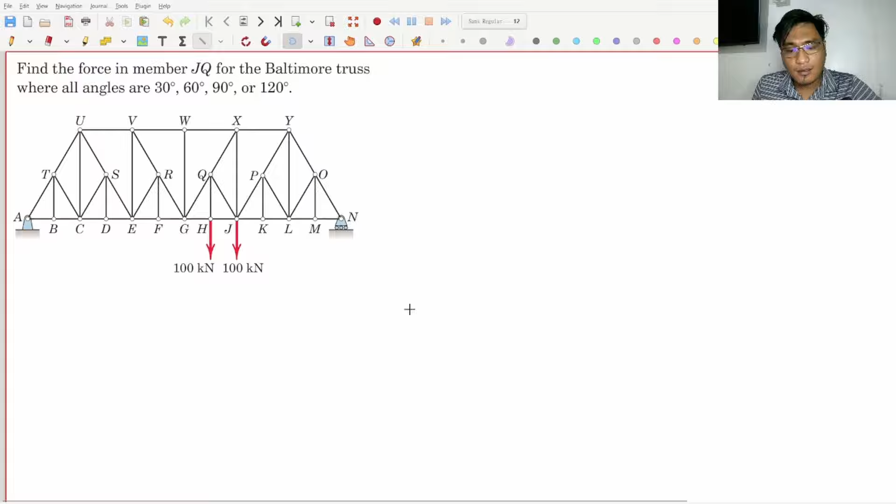Let me just remind you of the difference between method of sections and method of joints. In method of joints, what we previously learned is that if I have a structure, the basic concept is that if this whole structure is under equilibrium, therefore every joint must also be under equilibrium. So if I isolate joint H, joint G, joint F, or any other joint, it will also be under equilibrium.

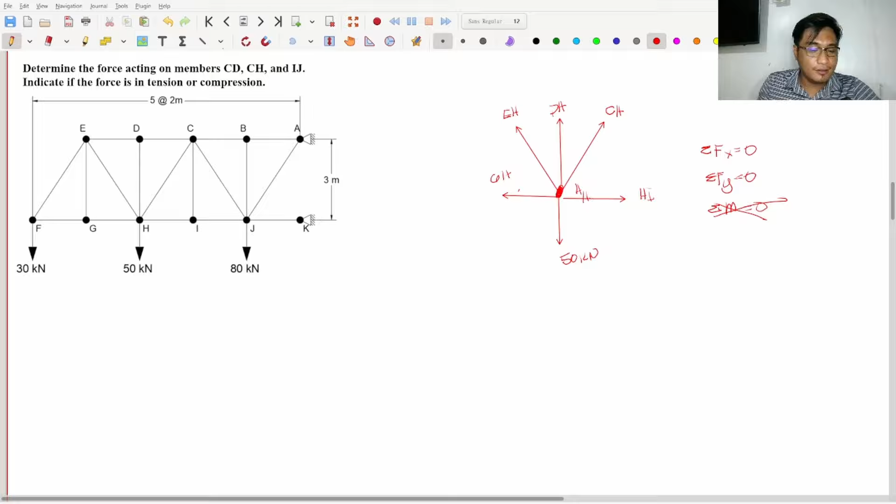So that's how we do method of joints. Let me just erase this one. Now, what about method of sections? If in method of joints, my whole structure is under equilibrium and therefore my joint is in equilibrium, it's the same in method of sections. Same concept: if my whole structure is under equilibrium, therefore my sections, or any section of my truss or structure, must also be under equilibrium.

So how can I make those sections? For joints, to isolate a joint or to do method of joints, we isolate joints. Here, we isolate sections. The question is, how do we make a section? That is simply by making a cutting plane, literally cutting the beam to divide it into different sections.

For example, we already discussed this. In this problem, it says determine the force acting on member CD. Let me just highlight this, member CD. Then, what else? Member CH. This is member CH. Then member IJ.

So now, what we'll do is literally put a cutting plane and divide the section. So our cutting plane would simply look like this. That would be your cutting plane. I'll call this cutting plane A.

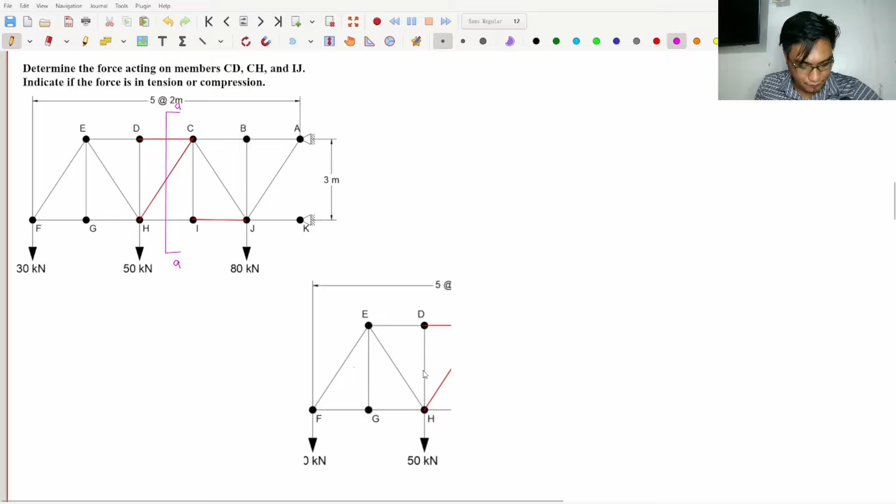So to make it clearer, let's just isolate this. I will literally just cut it, I just cut it. So this is... let's put it here. So this is isolate.

Sorry, this got cut off. Isolate the left side. Left side of cutting plane AA. Okay, this is cutting plane AA.

Sir, what if I considered the right side instead? That's okay too, either side works. It may be the left side, right side, bottom side, or upper side. All sections should be under equilibrium. But I chose the left side.

Tama? I chose the left side. Why? Because on the left side, there are no reactions, so I don't need to solve for the reactions first. If you opted to choose the right side, that's okay too, no problem, but you'd need to solve for the reactions at A and at K. But since I chose the left side, I don't need to put in the reactions, or I have no reactions I need to add. So make your life easier.

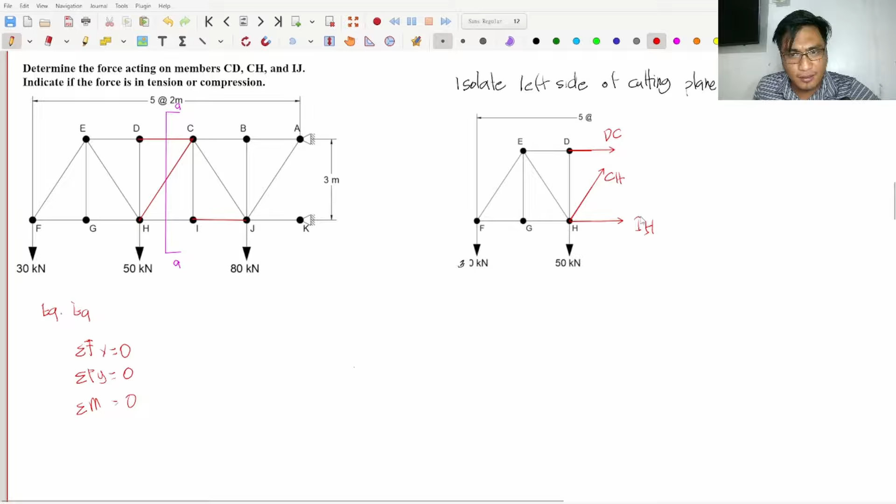So, 1, 2, 3 unknowns, that means I can solve it. So let's just solve for DC, CH, and possibly IH also. Once I've solved those three, I can just do another cut, like the one from before, because I already know these two, I only have 2 unknowns left, and therefore I can solve for IH and IG.

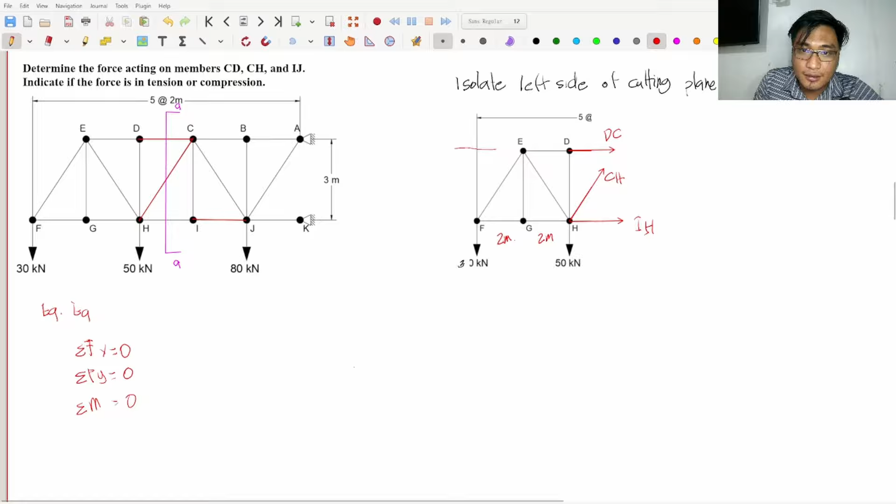Okay, so let's do this. I already have my cutting plane. To make it easier to see, let's just input the measurements. It says here this is 2 meters, then this is also 2 meters, then the height is 3 meters. So if this is 2, this is 3. Therefore, the slope here, the horizontal, this is it.

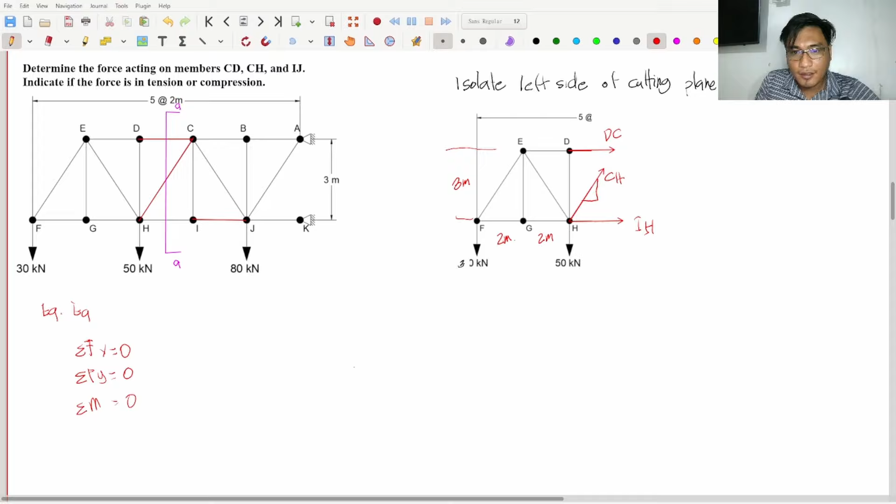The horizontal component is 2, the vertical is 3. So same thing here, right? 2, 3, then 9 plus 4, that's square root of 13. Square root of 13, tama? So, ibig sabihin...

Let's just solve this. Paano natin i-solve yan? I think the best way is to get one of the required values, which is CD or DC. Bakit DC pala? Let me just make this clearer. Okay, eto, let's just put CD. Tama? Ugaliin na lang natin na mauna yung alphabetical sa pag-name natin sa kanila.

So to get member CD, which is one of the unknowns or requirements of the problem, I think it's best if I take moment at H. Bakit maganda mag-moment sa H? Kasi if I take moment sa H, tama, one move lang, no? CH would have 0 moment, IH would also have 0 moment. So therefore, CD has a moment arm. So CD lang yung papasok.

So if I take... let's just make it black. Summation of moment at point H, this is equal to 0. So if I take moment at point H, I will have CD. I assume tension, so that is going to the right, so this rotation is positive. Tama? Clockwise, multiplied by 3, minus 30 times 4.

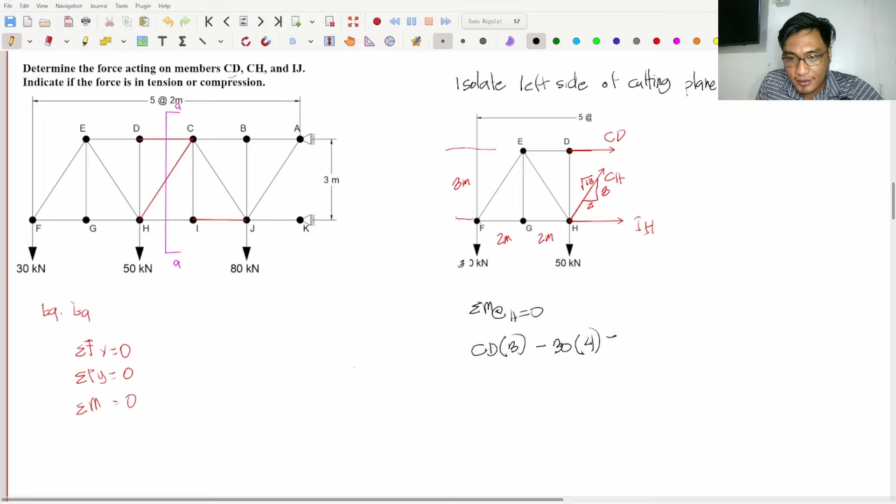Tama, this is 30. Minus kasi it rotates counterclockwise, tama? So 30 times 4. Ano pa ba? Wala na, kasi yung 50, tatama rin siya sa H, 0 moment. CH, 0 moment. So lahat ng yan, 0. So okay na, therefore CD is equal to 40.

Tama ba? Siguraduhin lang natin, baka magkamali. Negative, lipat sa kabila, 30 times 4 divided by 3. Okay, 40. 40, this is kilonewtons. So 40 kilonewtons, and this is positive. So therefore, my assumption that it is tension is correct.

So okay na ako sa one part, CD. Ngayon, dito naman tayo sa CH. So CH, I think it's also as simple as doing summation of forces along Y, equal to 0. Why is it better to do summation of forces Y as my next step? Kasi if you look at the members or forces here, CD okay na ako dito, na-solve ko na 40. Ngayon, if you look at it, the only unknown that has a Y component is CH, so pwede na akong mag-solve ng CH.

Summation of forces Y. So CH, going up, so that's positive, times quantity 3 over square root of 13. Wait lang, palagin na lang natin yung sulat natin, baka sa ganda. CH, manipis ata masyado yung sulat. CH times 3 over square root of 13.

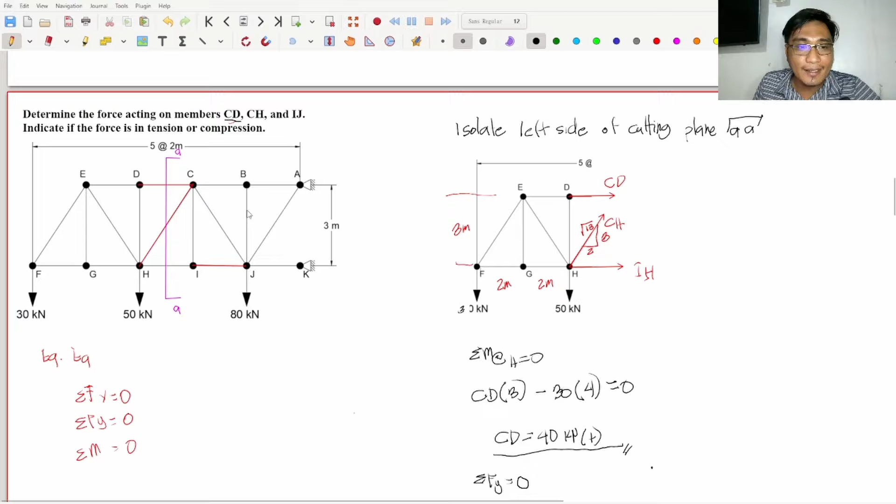Okay, now how can I solve, how can I do member or joint IJ? Wait lang, let me just cut this, copy, paste natin dito. Okay, so now if I do IJ, tama, ito na lang yung hindi natin nasosolve. Okay, so ito na lang IJ yung kailangan natin i-solve.

Ngayon, tignan natin ito na, let's try to investigate. Okay, the most obvious cut is that I can cut it like this. Tama ba? Yan yung pinaka-obvious na cut, kasi una, tatlo yung na-cut, so kaya kong solve. Pero kung titignan mo, magmumukha lang siyang ganito, tama? Where this is IH.

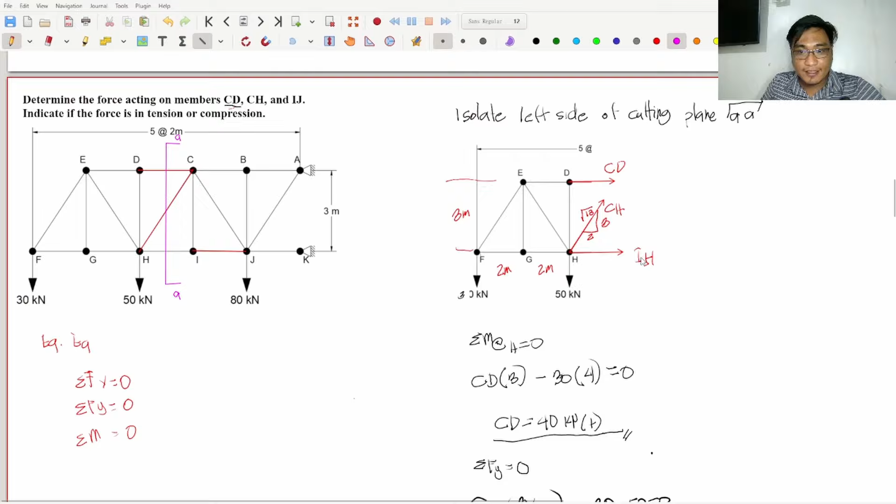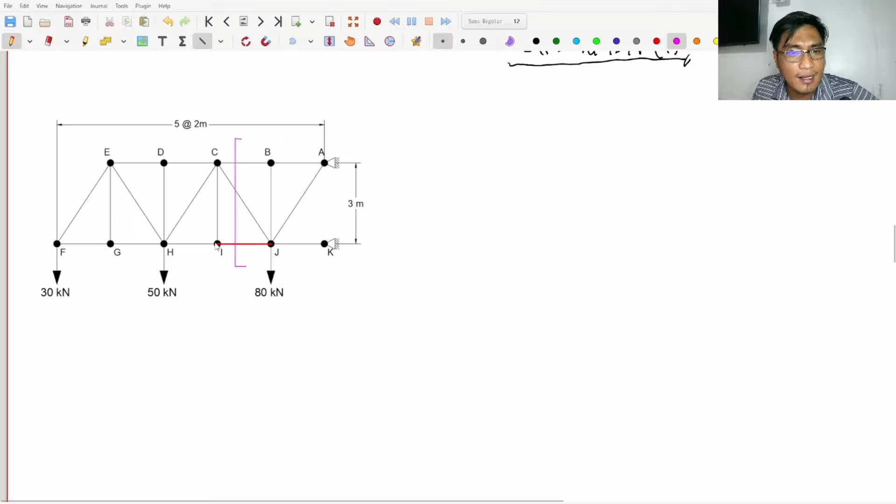Pero if you would try to do an investigation before going through with this cut, bago ko ma-solve yung IJ, ang gagawin pa natin is take summation of moment sa I para makuha yung CB. Parang ganito, kasi ito lang naman yung itsura niya, same forces or same orientation of forces, dagdagan lang ng isang span. Same lang din kasi yung AA parang cut lang din naman ng BB, na-move lang tayo, so ganito rin yung itsura ng forces.

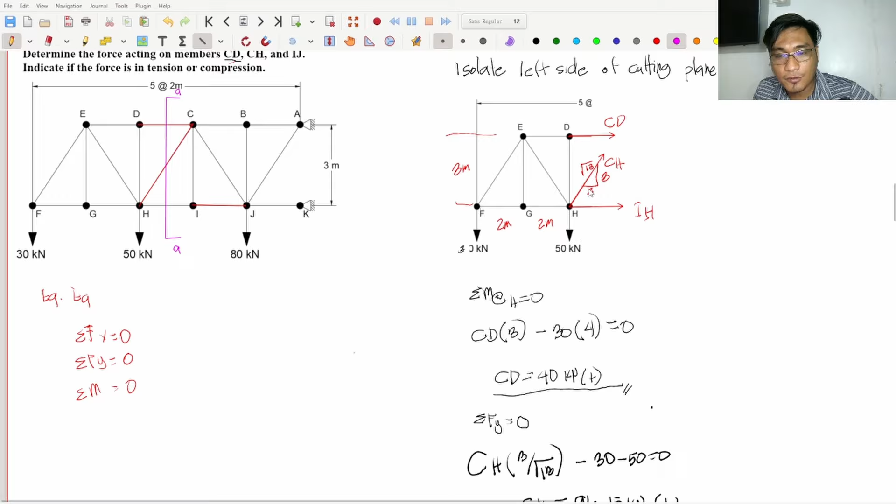So para ma-solve yung IH or yung IG naman in this case, kailangan ko mag-moment sa H. So if I take moment sa H, makukuha ko yung nasa taas, which is yung CD. Tama? Okay, wait lang. So after that, I take summation of forces Y para makuha yung CH, tapos summation of forces X.

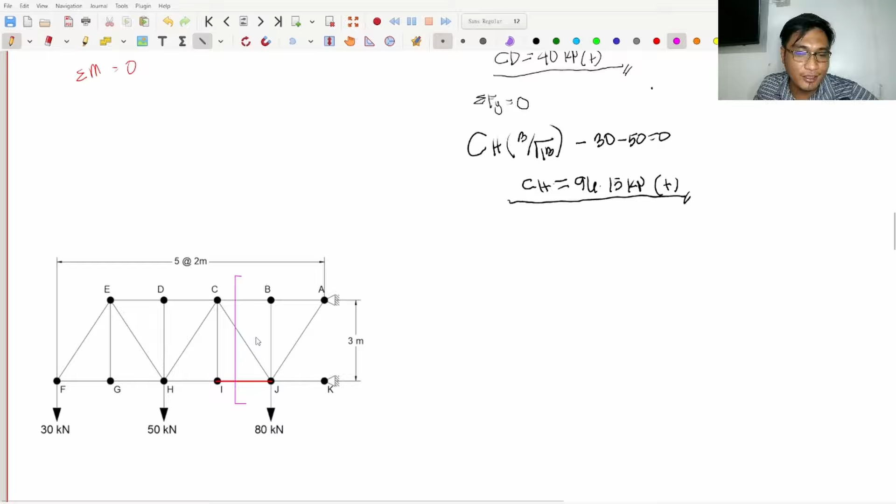So, that's 3 moves, right? So, I can do that. You can always do that, because the answer would still be the same, the answer would still be correct. Right? I can do that.

But thinking that there are three steps there, maybe there's an easier way. If say you're in a quiz or assessment and you're running out of time, and that's the first thing you thought of, I think it's best for you to do that right away. But if you're still trying or you still have time to investigate and check if that's the fastest way, I think it's better if you do it that way.

Instead of cutting it that way, what if what I do is cut along this way. So now, this I'll call cut BB. So if that is my cut BB, right, it still is a continuous cut. It doesn't matter if it's straight. It's still a continuous cut that starts from the outside of the truss and ends at the outside of the truss. So when my cut is like that, wait, let me just check.

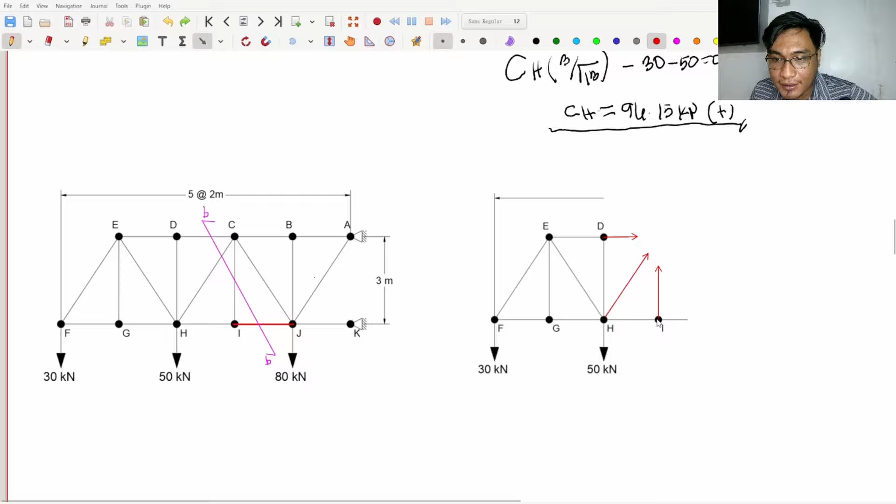So I have... Remember, all of the cutting, or all the method of sections that we will do here, needs to be indicated, needs to have a free body diagram. In your assessments, if you don't have a free body diagram, I won't check it.

Okay, next. So this would be DC or CD. This would be CD, this would be CH. And CD and CH are already known, right, there they are, I solved them earlier. Then this would be IJ. IJ. Then this would be, ay sorry, this is actually CI, CI. Then this is my IJ, which is the unknown.

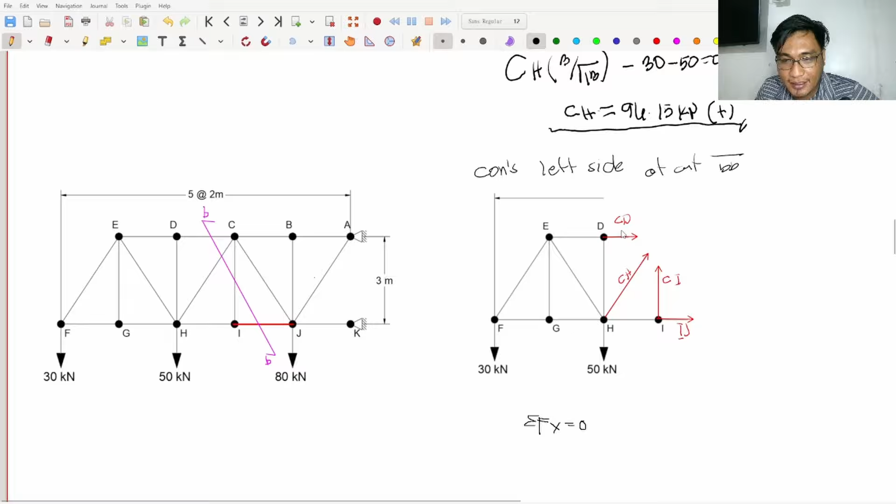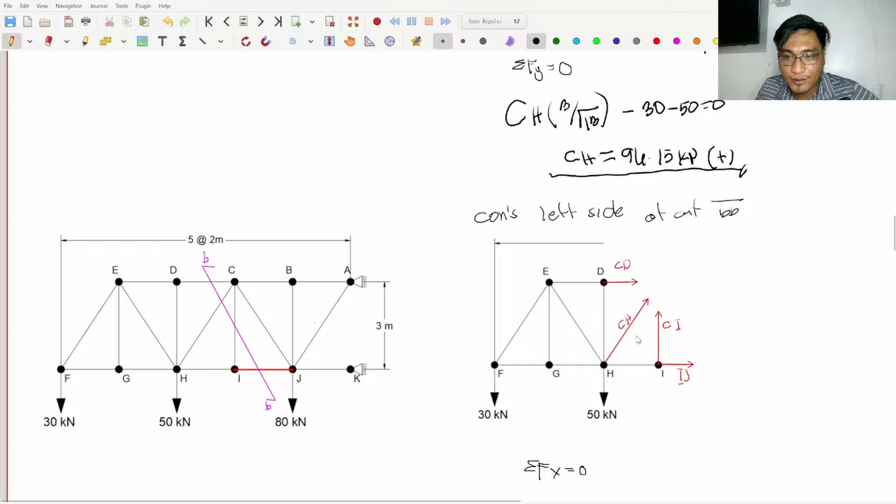Right? If you do summation of forces along X equal to 0, what's left are CD, CH, and IJ. But CD and CH are already known. So that means you can already solve that. Right? Because CD, check that, solve that. CH, solve that. IJ, that's what you need to solve. So you can already solve it using summation of forces along X.

Right? Okay, you can do that. But there's a simpler way to do it. If I extend this point, or if I extend this line here, extend this line here, right, that's all the line of action, they'll meet at a single point. So now, that single point, I think it's point C. Right, this is our point C from earlier. If I take the summation, if you did summation of forces X, it's the same thing, you'll still arrive at the same answer. But I think this is much simpler.

Summation of forces along X, force. Summation of moment along C, or at point C, this is equal to 0. Why do I prefer to take moment at point C? Because earlier, in summation of forces along X...

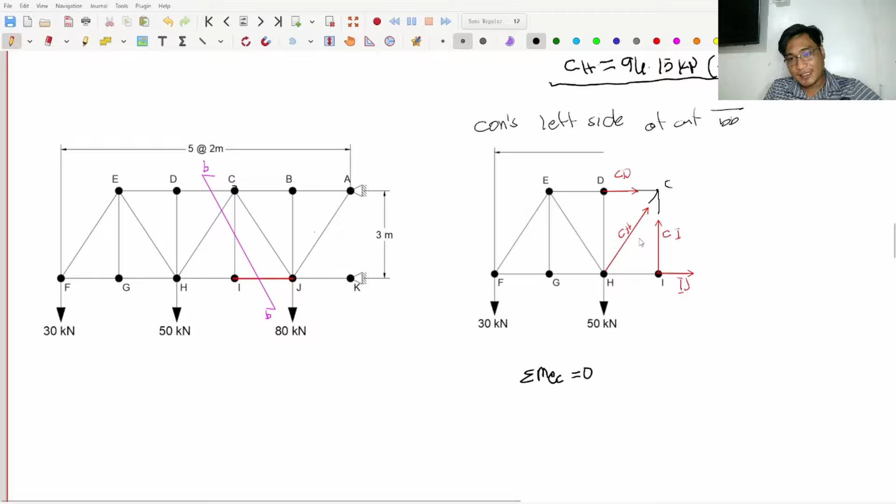What happens is that my answer for CD and my answer for CH, I need in order to answer IJ, which, I think, if you made a mistake in CD, your IJ would also become wrong. Your answer for IJ would become dependent on CD and CH. But if I take moment at C, I still get the same IJ, but I won't depend on CD or CH. If I made a mistake at solving CD and CH, I can still arrive at the correct answer at IJ because I don't need to use these forces to answer IJ.

Again, you can do that as your line of thinking. But if you're sure about CD and CH, you can do summation of forces X. I'm just showing you options to do this. So it's not, especially in method of sections, this is not a cut-and-dry, straightforward solution. You also need to analyze it, it's up to you how you want to answer it. There's many ways to kill a chicken, as they say.

Okay, so summation of forces, or moment at point C, this is equal to 0. So the moment of CD, 0. Moment of CH, 0. Moment of CI, 0. Right? Okay, so for IJ, I have IJ.

IJ is rotating at point C counterclockwise. So negative IJ, the moment arm is 3 meters. Let's check this, it's counterclockwise. So minus 30 times, this is the moment at C.

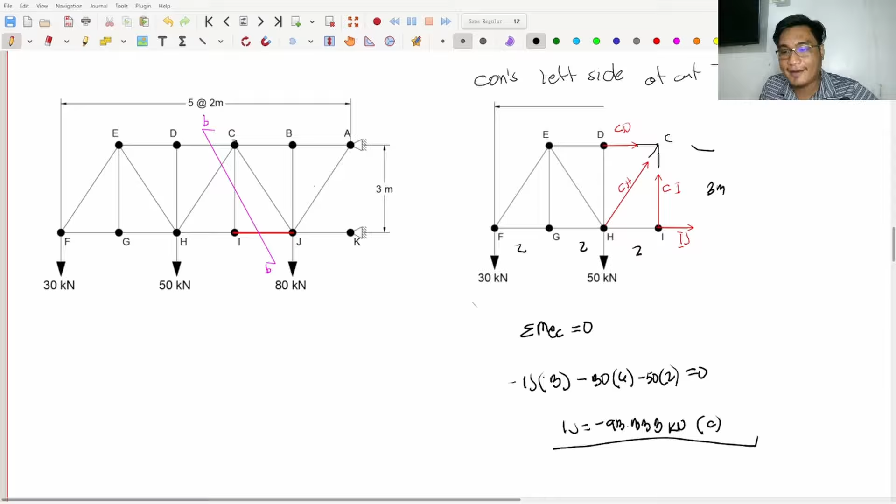That's 93.33333, so IJ is equal to 93.333 kilonewton, sorry, negative. So IJ is equal to negative, and since I got a negative value, my assumption that it is tension is wrong. So therefore it is compression. Now that's the answer, we're done with the problem.

If you want to check, summation of forces along X is equal to 0. That's what I said earlier, one way to solve for IJ. CD is 40 positive, plus CH which is 96.15, times the slope which is 2 over square root of 13, since that's horizontal.

CI has no component here, the 50 also has none since it's vertical, 30 also has none. So IJ, this is equal to 0. Therefore IJ is equal to, let's check if it's still the same in case we made a mistake, 96.15 times 2 over square root of 13.

That gives 93.33. Correct. The discrepancy is just because this is 93.333 versus 93.334 due to rounding off of 96.15. But they're still basically the same. I will still consider both answers. So negative 93.33 kilonewton, so this is still under compression.

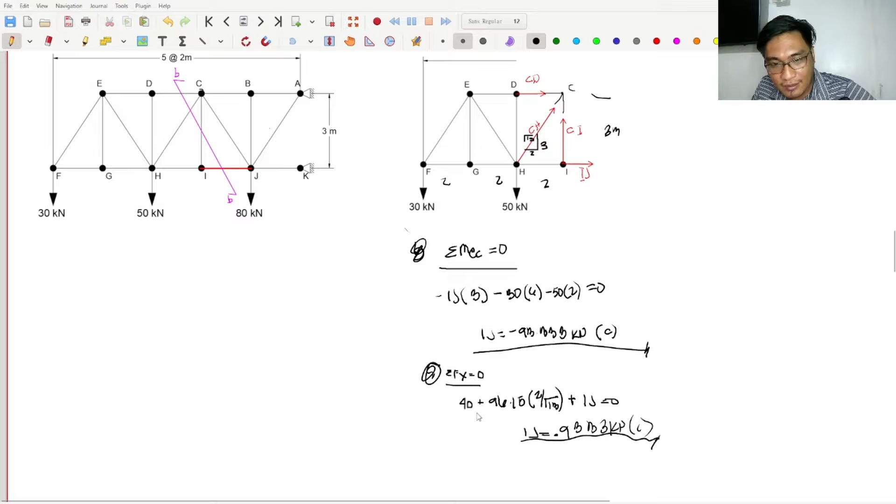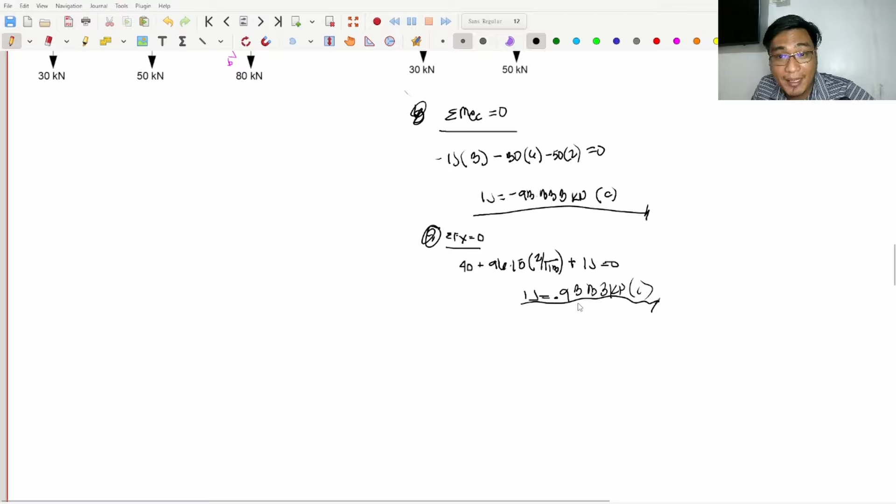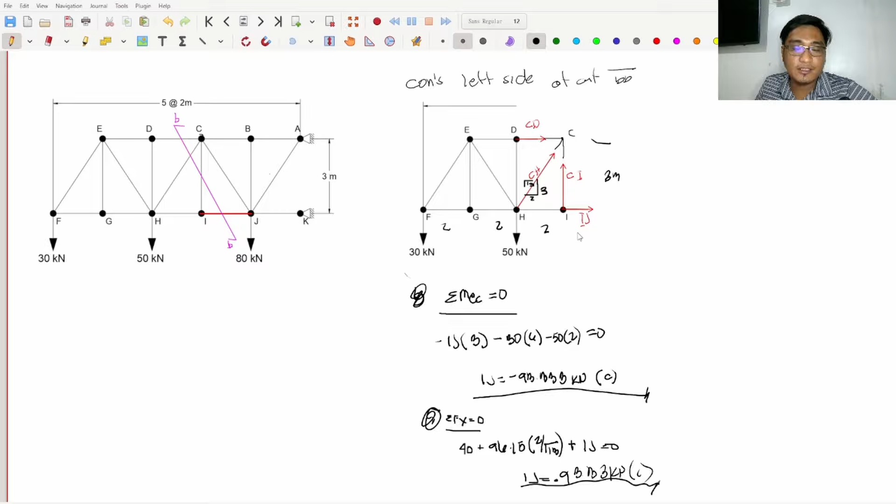So again, it's up to you. I'm not imposing any one correct solution as long as you still use the right concept. Remember, there's no single correct solution, there's only the right concept. Okay, after this, let's move to the next example.

Let's go to this one, it's easier. Okay, problem number two. It says, find the force in member JQ.

Since it says find the force in member JQ, where is that? Here it is. Only one was asked for, right? So this member here. Looking at this, it doesn't give a distance. Since it says all angles are 30, 60, 90, and 120, I think this is 90, this is 60, and this is 30.

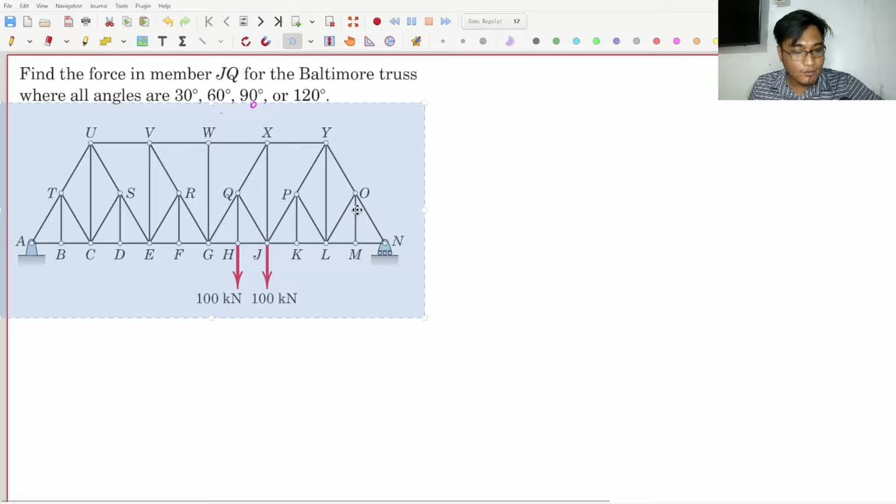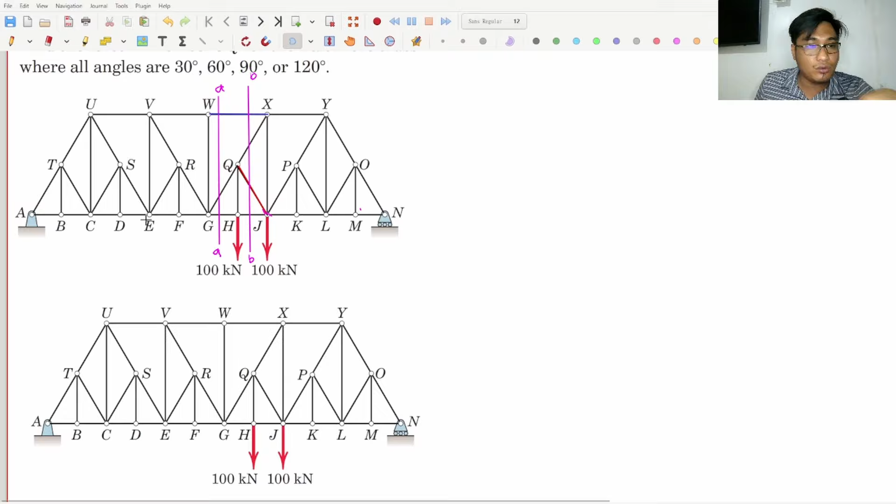Okay, so pwedeng ano, no? So I think before we do that, I think it's better or required for us to solve for the reactions, kasi hindi naman natin masosolve to. Kasi if I consider the left or the right side of the section, the cutting plane, I still need one or two of the reactions.

So I think it's better if I use, ano ba maganda? Left side na lang, mas trip ko tong left side. Ay sorry, right side na lang kasi puro tayo left. Parehas lang naman yan. So dito meron tayong, oops, ganyan, para hindi magkalituhan, red din to. Okay.

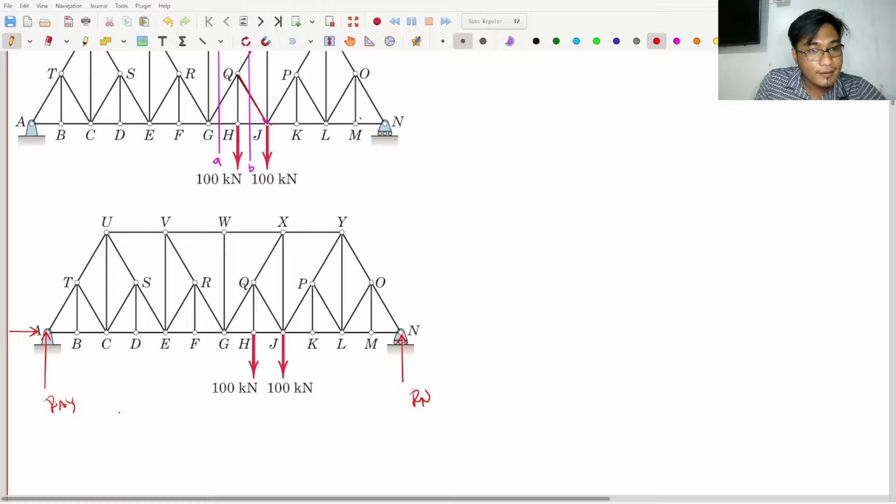Okay, now since pin yan, syempre may RAX. Pero alam mo na kasi yan, if we do summation of forces along X, ito 0 na yan. So this will now be, ito ay RAY, tapos ito ay RN. Now, oo, walang distances yan, no? Pero I think, since sabi niya kasi kanina dito, they are all 30, 60, 90, 120. So ibig sabihin, pare-parehas lang yung mga angles na yan.

This is just X. If I call 1, this distance X, so dapat yan, lahat yan X din yan. So I'll just call itong mga distances na to as X. Okay? So if I call this AB is X, BC is X, CD is X, DE is X, EF is X.

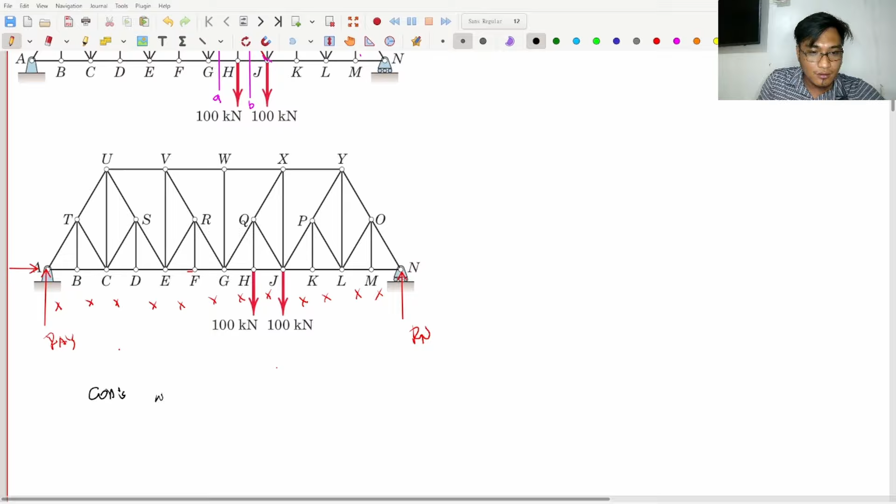Okay, ibig sabihin, considering, so now, just to use this. So consider the whole structure, eto siya. What I will have is that if I do, sorry, moment at A is equal to 0, para makuha ko lang yung RN, I will have RN, tama ba? This RN here is 1, 2, 3, 4, 5, 6, 7, 8, 9, 10, 11, 12x.

12x minus, sorry, this one is rotating counterclockwise, so it's negative. This one naman is rotating clockwise, so positive, plus 100 muna. That 100 is 1,2,3,4,5,6,7, so 7x.

Okay, matakot sa x, no? Mawawala yan. Plus 1,2,3,4,5,6,7,8, so 8x. So 100 times 8x. This is equal to 0. So therefore, ngayon kung papansinin mo, lahat sila may x. So if I divide all, or multiply na lang, mas maganda. If I multiply both sides of the equation with 1 over x, tapos eto rin yung 0, multiply ko rin ng 1 over x, ang lahat ng x ay magka-cancel out. So wala na rin siya.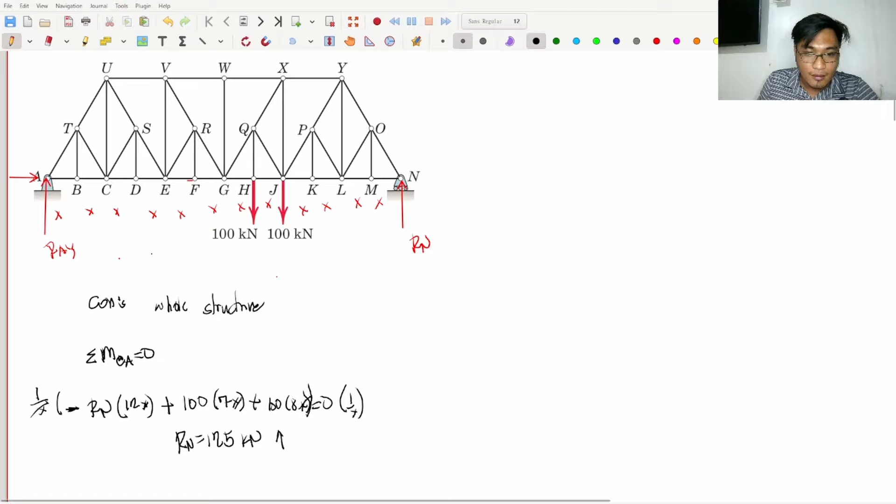Parang 100 times 7 plus 100 times 8 divided by 12. So this is 125. So Rn is equal to 125 kilonewton positive, so going up. Okay, so that's Rn. So Rn ko daw, ito ay 125. So now if I know that Rn is 125, I can just simply now isolate.

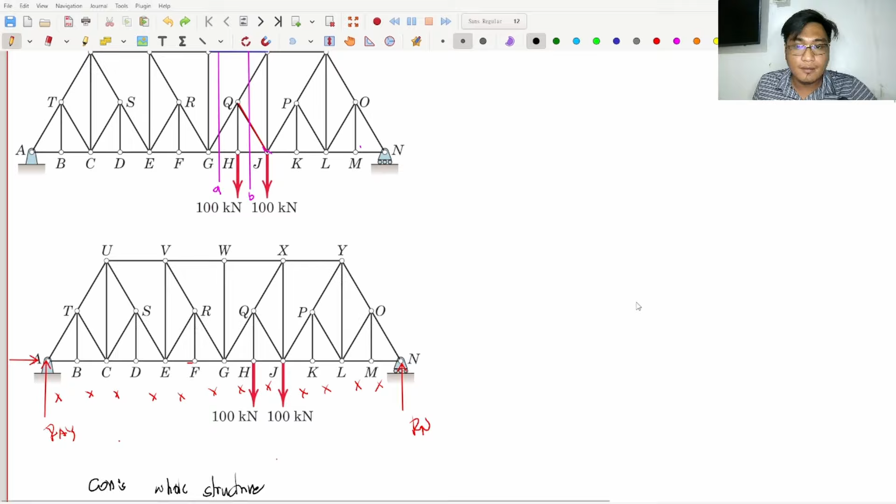I can now just simply cut it at AA, tama? Yun, cut natin sa AA. Okay, so ito siya, no? Palagay natin ng konti. Yan, lagay ko lang dito. So this is now Rn.

Is equal to, this is already known to be 125 kN. Tapos ito, nabura lang pero 100 yan. Tas eto yung aking WX, tama? Assume natin yan na lagyan natin ng direction or ng force, equivalent force system niya, which is tension na lang din, no? I'm assuming everything is tension. So ito naputol din. This is also tension. Tama? This is also tension.

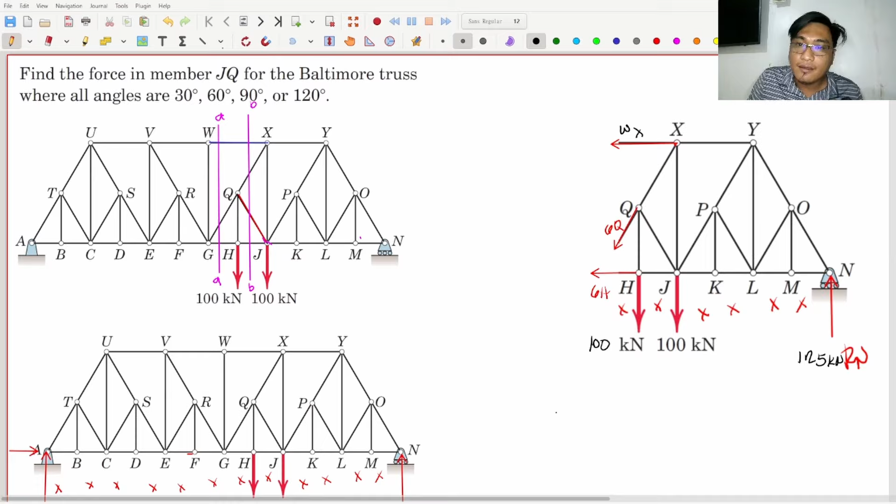Okay, so this is WX, this is GQ. This is GQ. This is GQ. Tapos ito ay GH. Okay, so now this is considering right side of cut AA. Okay, so tama. Yun yung cut AA ko, no?

Okay, now considering the right side of cut AA, alam ko naman na yung game plan natin, di ba kanina? Solve for WX first, then now proceed to cut BB. Tama? So if I solve for WX here, I can do, ano ba? Ayan. Tama? May intersection yung dalawang yan, di ba? Kasi if I extend this line here, this point, the point of intersection ng GH tsaka ng GQ is etong point G. Tama? This is point G.

Yan. So if I take moment at point G, I can solve for WX. Pero the problem is, if I take moment at point G, the problem is hindi ko alam yung distance na to. Pero I think I can solve this. Yan lang naman yung isa. What's this distance? Ano tong distance na to?

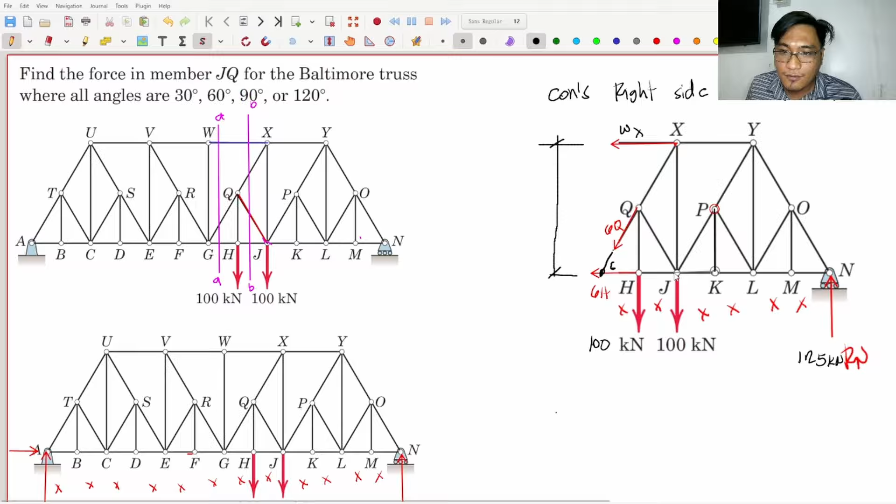Okay, so now let's consider. If this is x, ito. If this is x, so let's make a simple triangle. So let's try to create a triangle. Okay, so ito siya, no? This is this triangle. Yan, itong triangle na to, ito siya. Baba ko lang siya dyan, lagay ko siya dyan.

Tapos, ang sabi natin, ang alam ko sa triangle na to, okay sorry. So ito daw ay x. So if this is x, tapos sabi niya kasi, lahat ng angles 30, 60, 90, and 120. So ibig sabihin, ito ay 30, ito ay 60, tapos ito ay siyempre 90. 30, 60, 90 triangle. Yan.

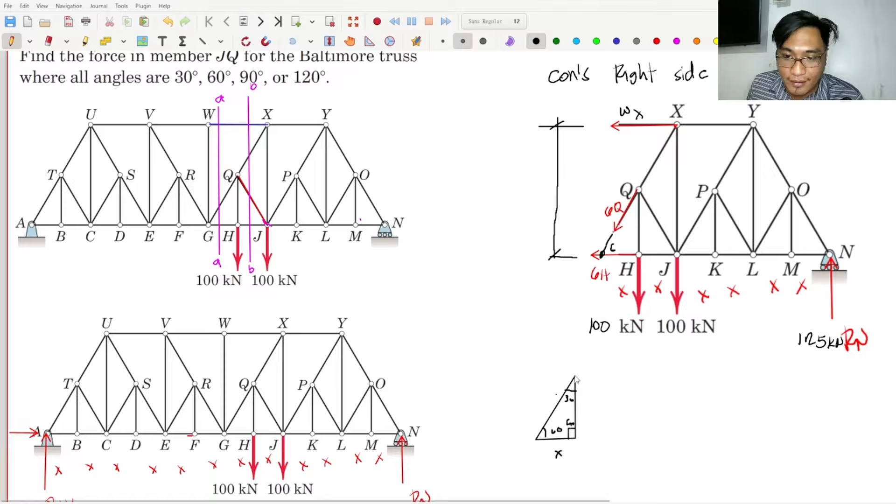So if it's a 30, 60, 90 triangle, what I want to find out is this distance. Tama ba? Yan. Okay, so now just use your trigonometric function. If I know that this is 60, okay let's just zoom it in. If I know that this is 60, tama ba? So I can just use the trigonometric function. Tangent 60 is equal to opposite. Let's just call this y kasi alam kong y yan. So y over x. So what's tangent 60?

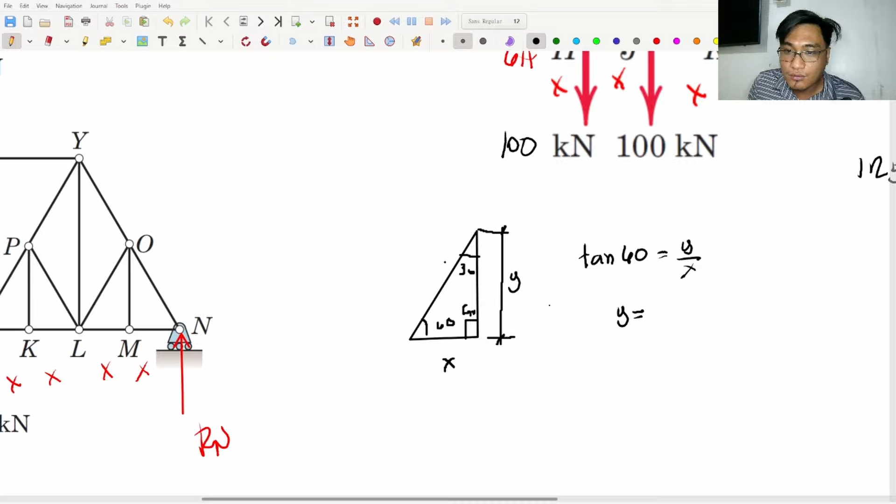Tangent 60 is square root of 3. So y is equal to, tama ba, x times square root of 3. Okay, tama. So itong distance na to, this distance is x square root of 3. Okay, so if this is x square root of 3.

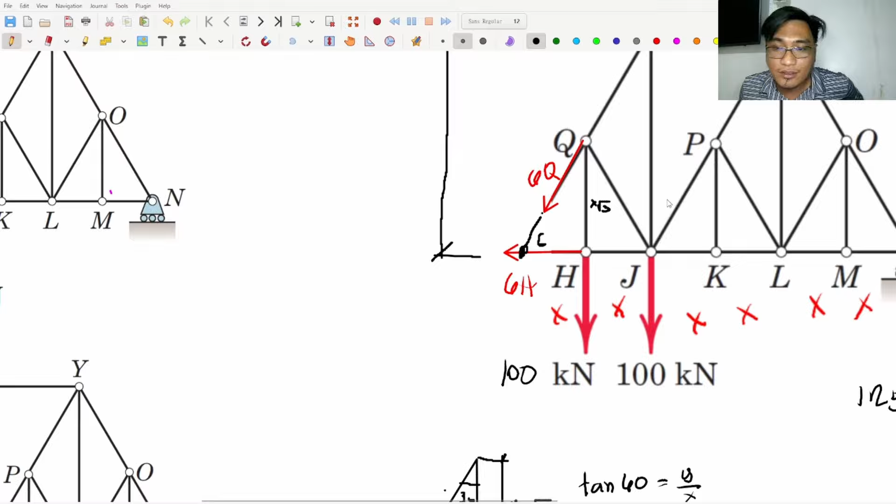So wag na kayo matakot sa x. Consider nyo lang yung x as 1 kasi lahat naman yan magka-cancel lang, or x is equal to 3, I think it's easy to realize that this triangle, etong triangle na to, is an isosceles triangle. Kasi kung lahat naman ng angle na to, if this is 30 degrees and this is 30 degrees, if this is x times 3, x square root of 3, eto din ay x square root of 3. Tama ba? So the distance from this to this is 2 times x multiplied by square root of 3. So ayusin lang natin para maganda tignan.

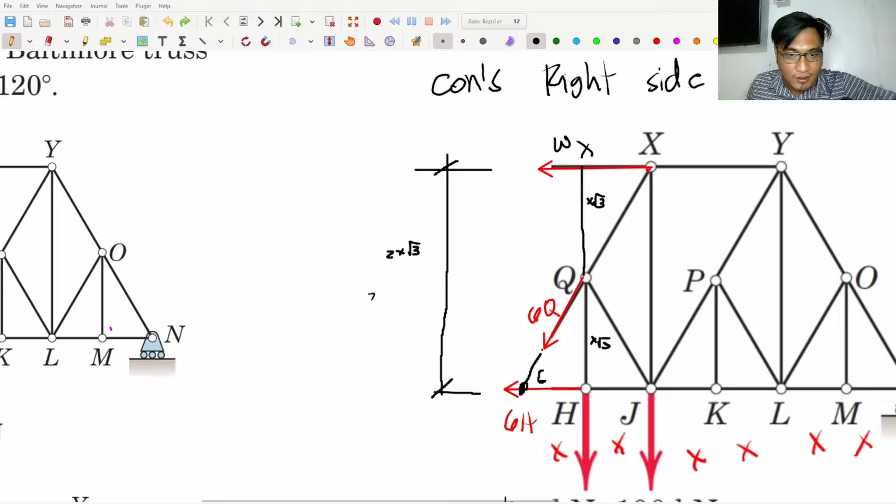2, you can square that. This is 2 square root of 3 x. Okay.

Now if I know that, this is not a mechanics problem, it's algebra and trigonometry. So it will be as simple as doing summation of moment at point G. I will take moment here at point G because GQ and GH, which I don't need, will hit point G with zero moment arm. The only unknown I'll have is WX, which is what I need in order to use cut BB.

So if I take summation of moment at G, let's start with WX. WX multiplied by, and this is WX is 2 square root of 3 times X. Minus, this X here is just the name, the other X is the actual distance. Minus, let's label it WX bar, just so we know.

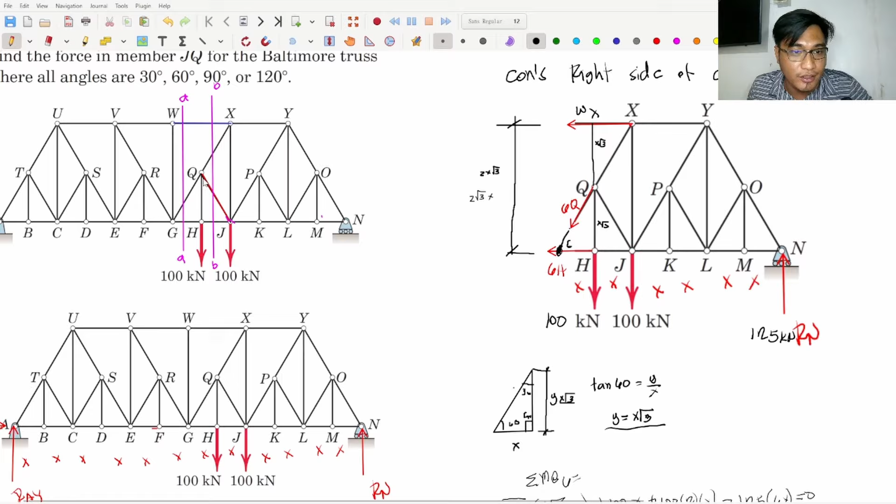Now, if I've already solved for WX, I can go directly to cut BB, since GQ and GH were not asked. I only solved for WX because if I consider cut BB now, this is our cut BB. Wait, let me show you.

Let's move this a bit. Okay, so this is cut BB. So now all I need to do is consider the right side still, the right side of cut BB. If I consider the right side of cut BB, this is what got cut, you have 1, 2, 1, 2, 3, 4.

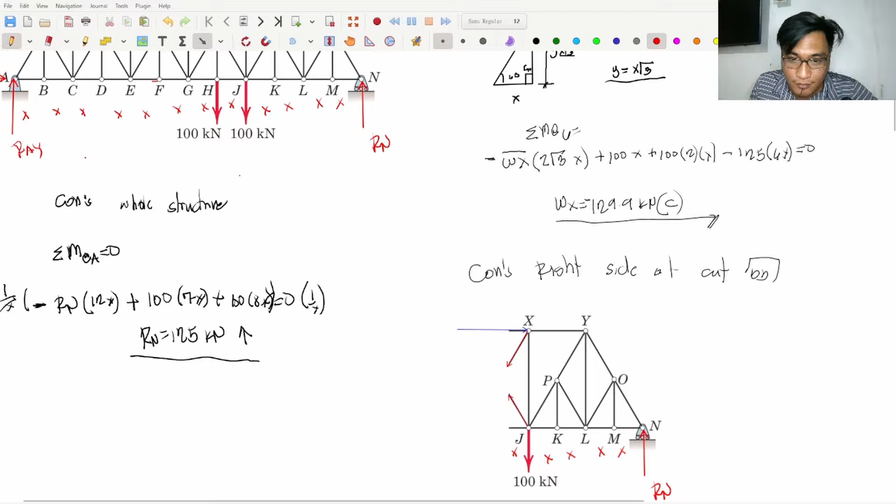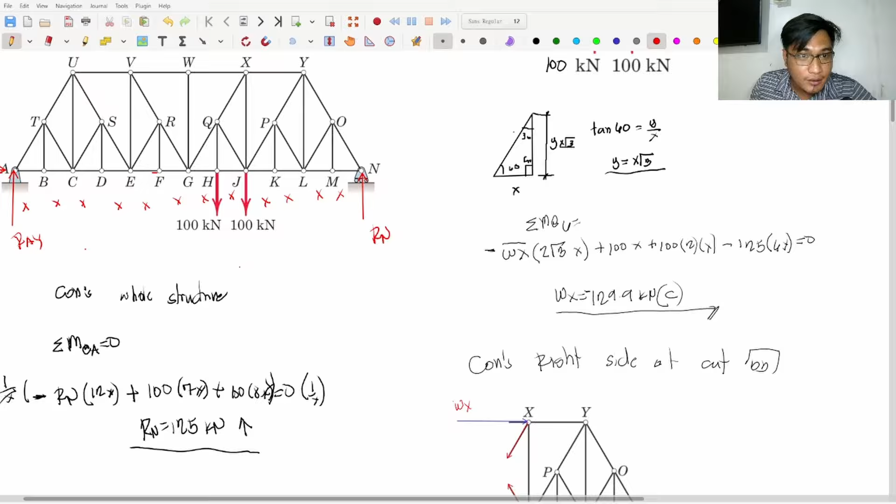This will now be, what was it earlier, Wx. So this is Wx, then this is Qx, then this is JQ, right, that's what we're looking for, JQ. Then this is HJ. Okay, so we're good there.

Now I know that Wx is already equal to 129.9. So we're complete. Then I also know that this distance here is x square root of 3, or square root of 3 times x. Okay, this distance here up to this point.

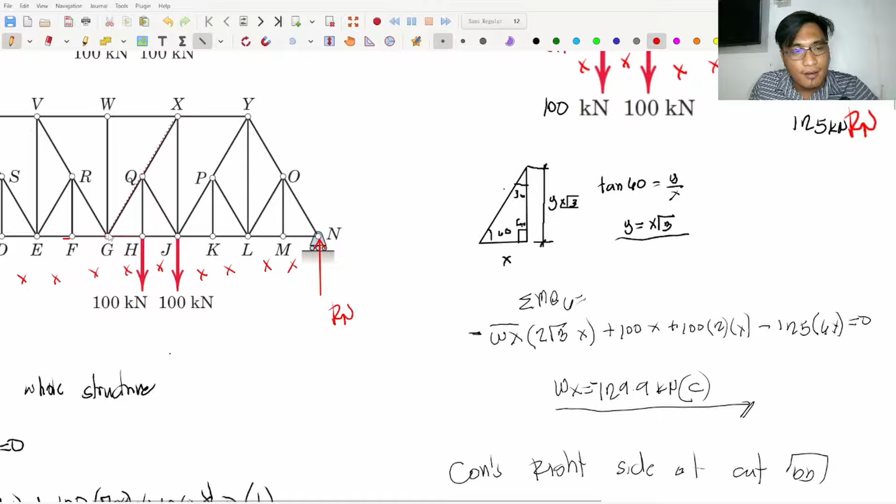This point here. So if you look, nothing. If you look here, right, this is it. This is XQ. Let's extend it to point G. The point of intersection with this force is point G. Right, this point is already point G. So this is, wait.

This is point G. So if I take the summation of moment at point G, this is equal to 0. That means QX and HJ are gone. WX is there, but I already know it, so I'm okay with that.

Now let's take JQ, since it's inclined, I need to break it down into its components to use it. Because this distance, if I extend it, is not the perpendicular distance, so I cannot use that distance. So what I need to do is break it down into its components.

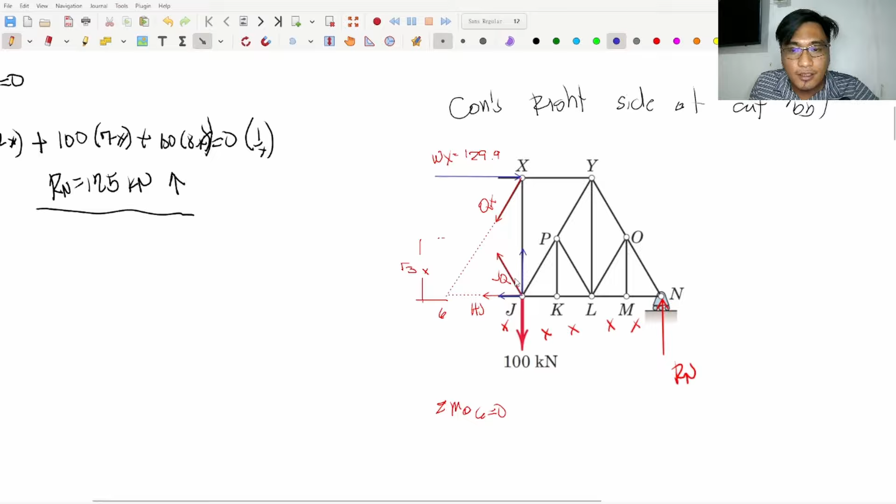If this is the 30-60-90 triangle, we already did this earlier. This is 60 degrees, right? This is 60 degrees.

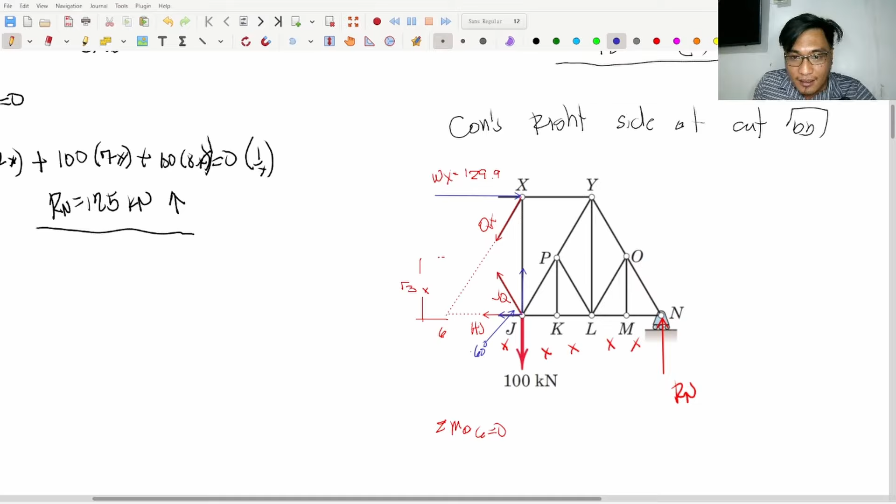Now when I break this down, the x component hits point G, so that becomes 0 too. Okay, so now I see what's the best way to solve this. Okay, so where are we now?

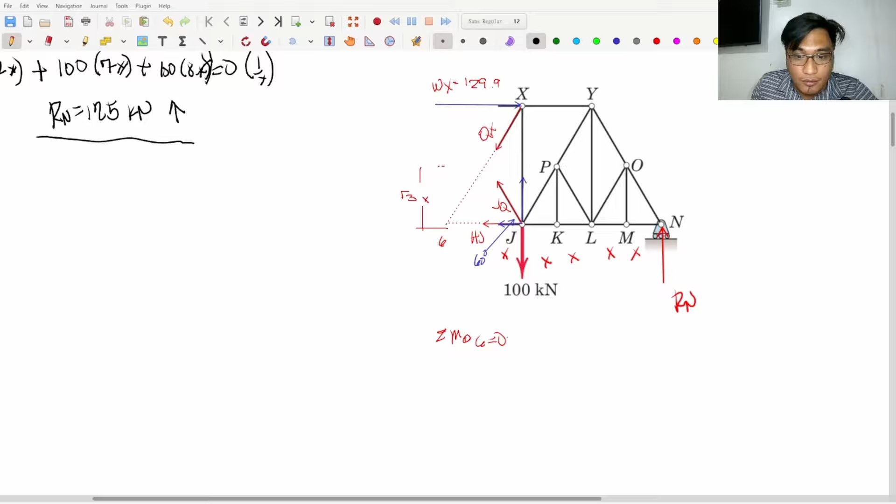So now all I need to do is JQ. So its y component, this is just the y component. JQ's y component, if this is 60 degrees, that is sine 60 degrees, multiplied by the moment arm which is 1, 2, right. It's not just single x, because this is point H here, then from point H to point G there's another x.

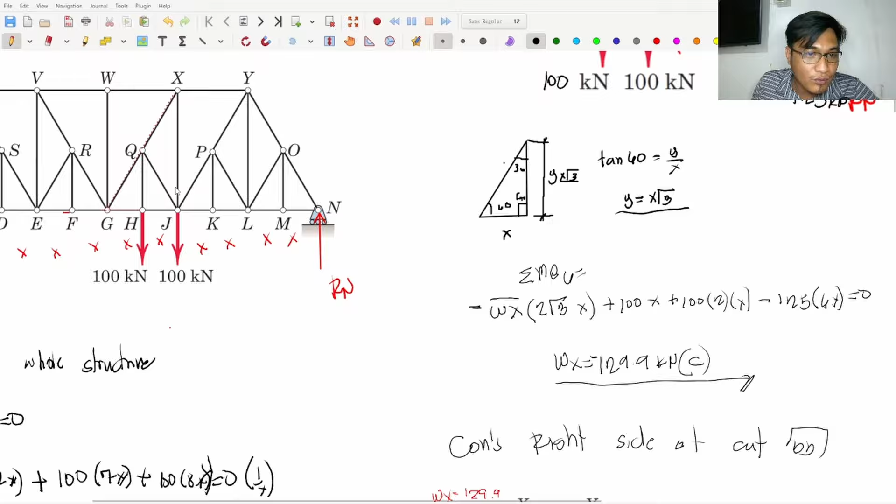So this is 2x. Since I'm taking moment at point G, this is point G, this is my y component, so 1x, 2x. This is rotating counterclockwise, so that's negative. The y component's x component is already 0, so that's gone.

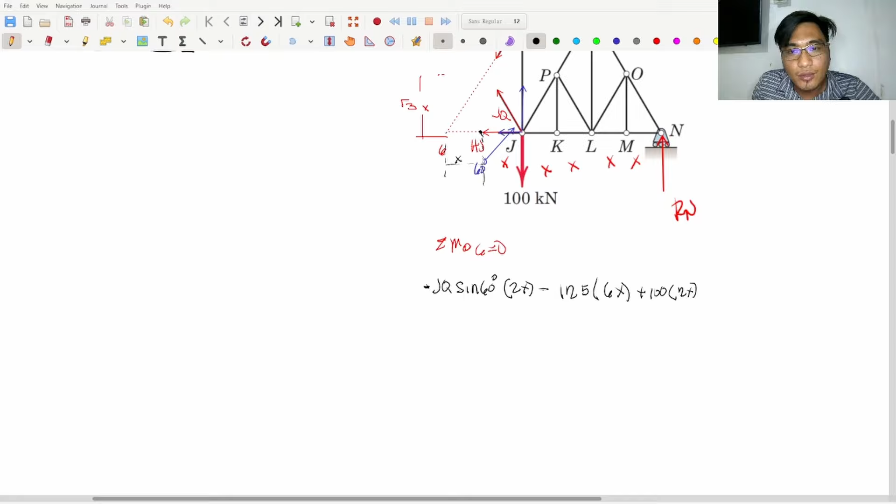So Rn, minus - is it minus? Okay, minus 125 multiplied by, this is 1, 2, 3, 4, 5, 6x, 6x minus - wait, plus actually - 100 times 2x, 100 times 2x, then after that there's also the one above, 129.

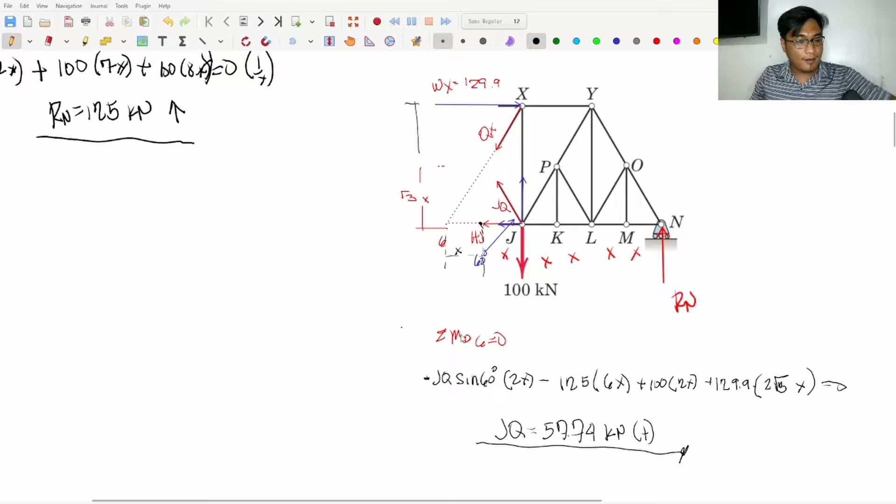JQ is equal to 57.74, positive, so this is kilonewton tension. Okay, so that's the final answer. That's what was being asked in this problem.

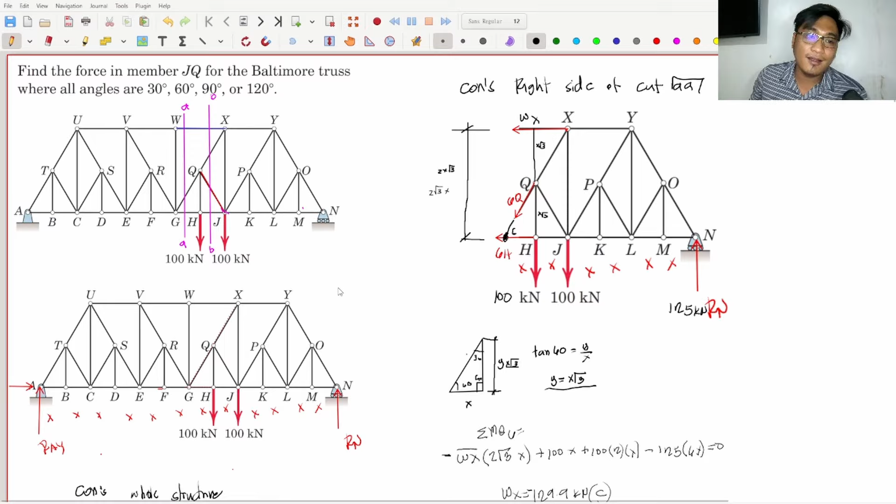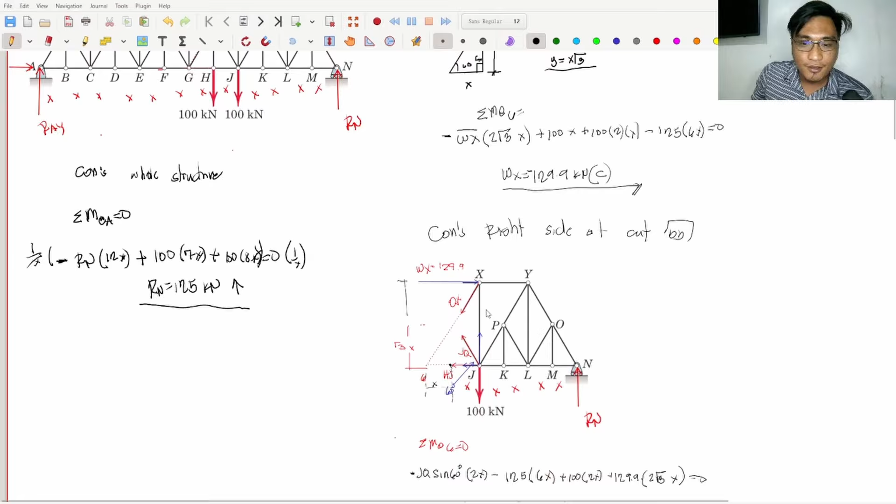This kind of problem is method of sections, it's very simple really - you cut, do the free body diagram, then do the equilibrium equations. Again, the most common hardship for students here is not the mechanics itself. The equation is very easy, that's all. What's boxed there, that's the only mechanics part.

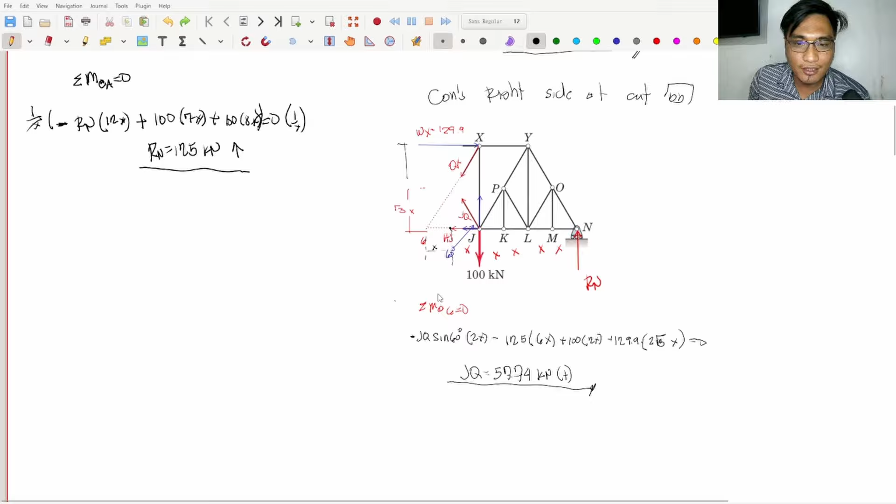This, the free body diagram, is mechanics too. But the hardest or most common mistake, or most common reason for mistakes, is mathematics or foundational mathematics - your algebra, your trigonometry, your geometry. So make sure guys that you catch up on your foundational math.